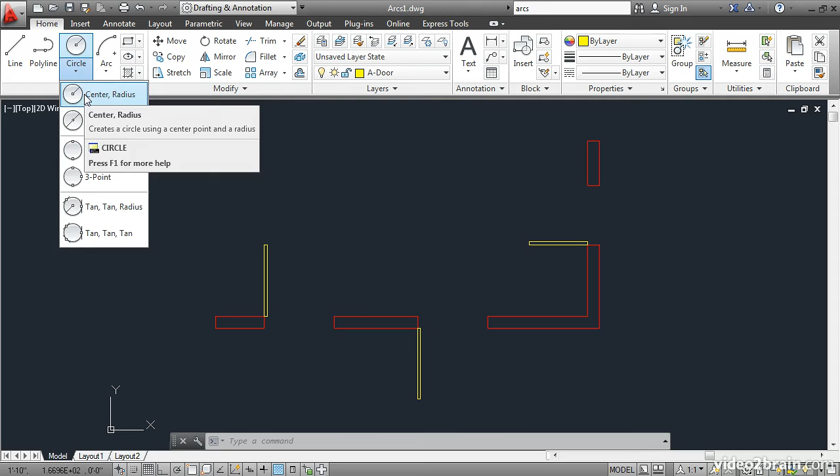I'd like to create a circle which is centered at the hinge of this door, but instead of eyeballing it by clicking approximately where I think that should be, I should snap it precisely.

This time, click on Object Snap on the status bar, and it will open the Object Snap tab of the Drafting Settings dialog box. This allows you to set up running object snap modes which stay on, so you don't have to use Shift right-click every time you want to call for an object snap. I'll select Endpoint and click OK.

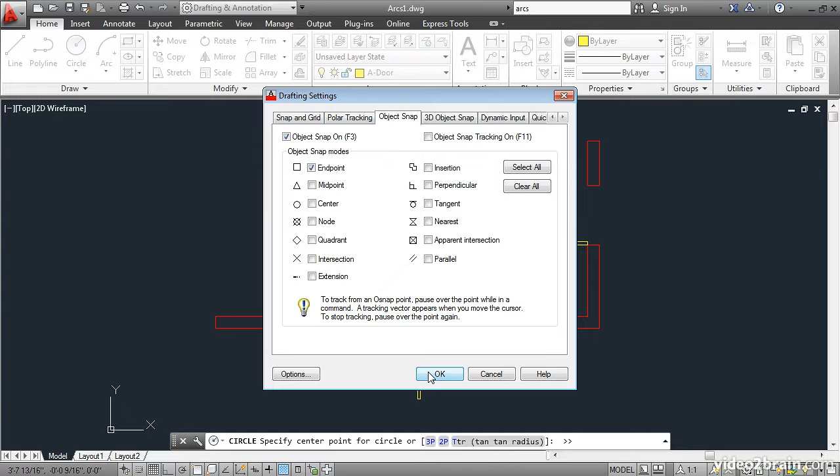Now, I'll position the cursor over the hinge point of the door and click to specify the center point for the circle. Then I'll come up here and position the cursor right on the end of the door. I'll click a second time to specify the radius of the circle.

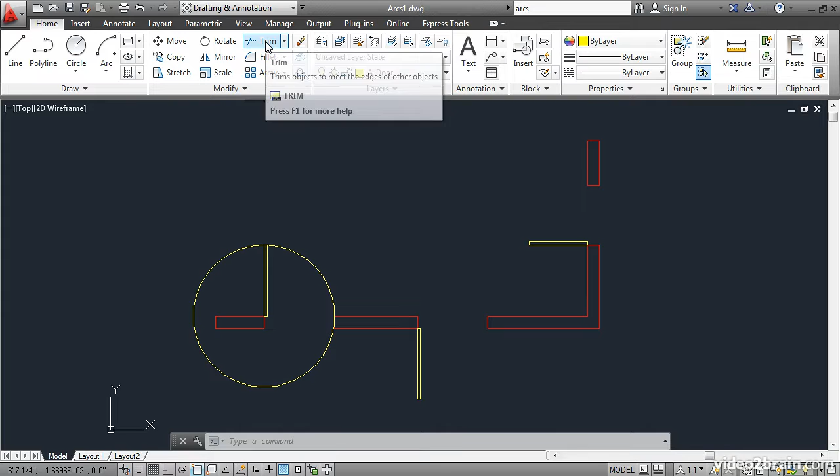Next, click the Trim command on the Modify panel. On the command line it says Select Objects or Select All. The first part of the Trim command requires that you choose which objects will be cutting edges, and in this case, I'll just press Enter to select the default option, Select All. So all the objects can act as cutting edges.

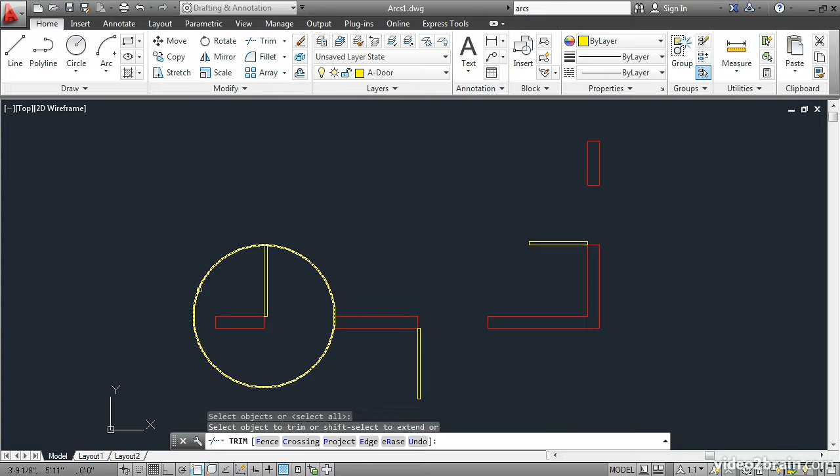Now I'll click this portion of the circle to trim it away. We're left with an arc. I'll press Enter to complete the command. Just to make sure that this truly is an arc, let's turn on Quick Properties, and then click on the arc without issuing a command.

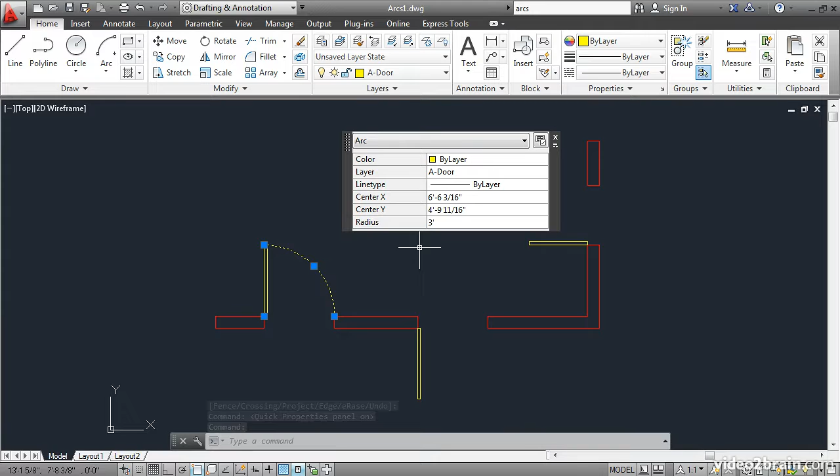It says right here it's an arc, and it gives the properties of that arc. It has a radius of 3 feet, which apparently is the opening in the wall and the size of the door. I'll press Escape to deselect the object and close Quick Properties.

This time, let's use a specialized arc command to draw the second door swing. I'll open the flyout, and you can see that there are many options here. Some of these options have the same items, like Start, Center, End. Down here it says Center, Start, End. So they're just in a different order. It's really a matter of personal preference which one you use.

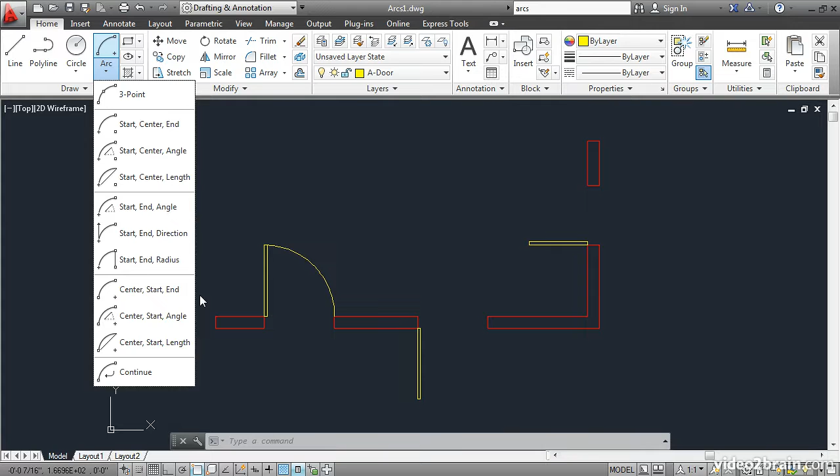In this case, I think I'd like to specify the center point first, and then the start of the arc and the end of the arc. So I'll click here, and then the command line says Specify Center Point of Arc. I'll come over here and click this hinge point, and then the start point could be here or it could be here.

But it has to be on the door because the default option for arcs is to create the arcs in a counterclockwise fashion. So if I click here, you'll see that as I move the cursor, the arc is swinging out counterclockwise from the start point. I'll click here to end the arc, and the command is completed.

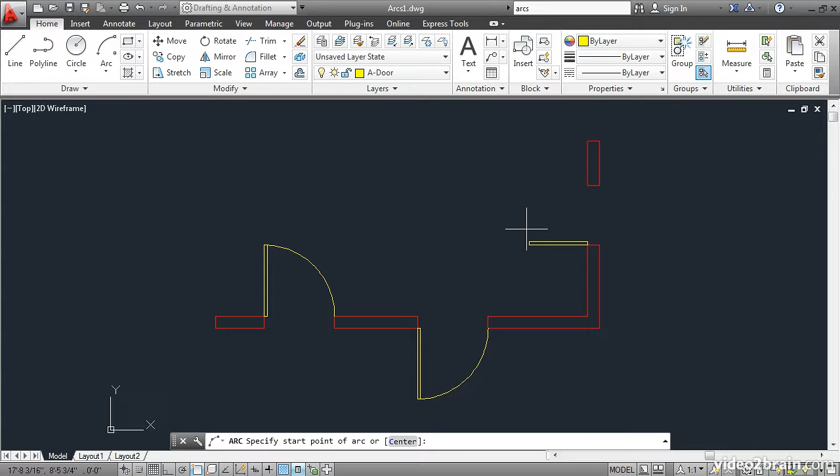Let's try that again. This time, I'll use this method, Start, Center, End. If I choose the start point here, we're going to have a problem that you'll see. I'll click here, and then it asks for the center point. I'll click here, and then the end point here.

You see the problem? The arc is created in a counterclockwise fashion from start to end points. Because I chose this as the start point, I ended up with this problem. So let's erase that. I'll click the Erase tool, select the object, and right-click to Enter and complete the command. Let's try that again. Start, Center, End. So the start would be here, the center is here, and the end is here.

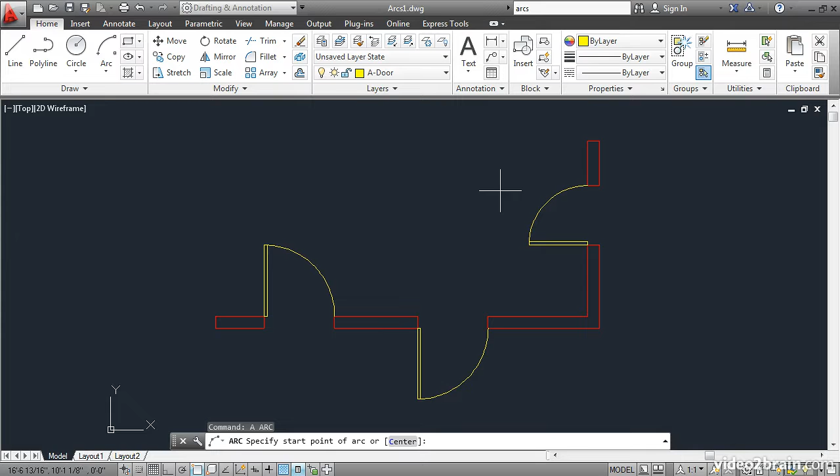That method worked pretty well for creating door swings, but there are occasions where you want to create curvilinear walls or curved items, and to do this you can string a series of arcs together. I'll type A, Enter, to execute the arc command. The default method is to click 3 points, the start point, the second point, and the end point.

If you press Enter and repeat the arc command, and then press Enter again, the arc will continue on from the last one, and the second arc will be tangent to the first, so that there's a nice curvature where the arcs meet. I'll press Enter to repeat arc, Enter again to continue, and in this way I can create a nice curvilinear form without any discontinuities or kinks between the arcs.

You can edit arcs by clicking on them without issuing a command, and I'll turn off Quick Properties to get it out of the way. The grips are these blue squares, and they represent the key points of the arc, the start, midpoint, and end of the arc, and the center point.

I'll hover the cursor over this grip and I see a little menu that appears. This is called a multifunctional grip. It says stretch or radius. I'll choose stretch, and you can see what I can do here with this grip. I can stretch its midpoint, and the start and end points stay where they are.

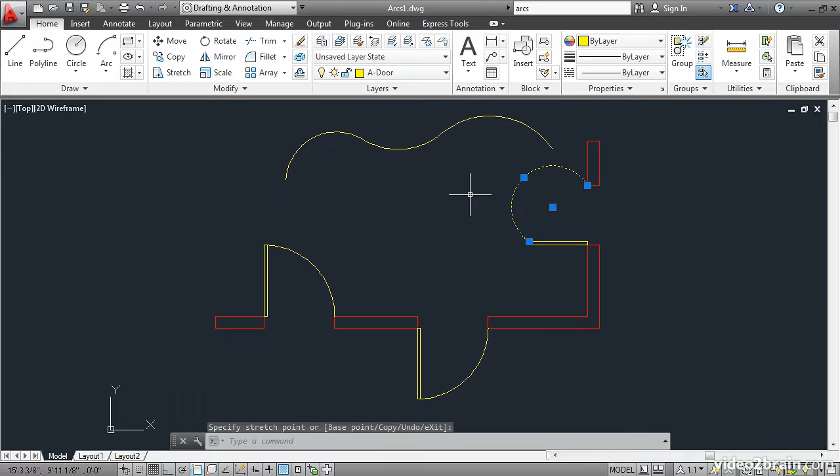But the center moves, because remember, arcs are always portions of circles, so if you change the curvature, it makes sense that the center point would move. You can alternatively change the radius of an arc, and that makes a concentric portion of a circle. You can also stretch or lengthen an arc by selecting one of its endpoints. And in this way, you can reshape arcs very easily. You now have some practical experience creating arcs and are aware of their creation options.